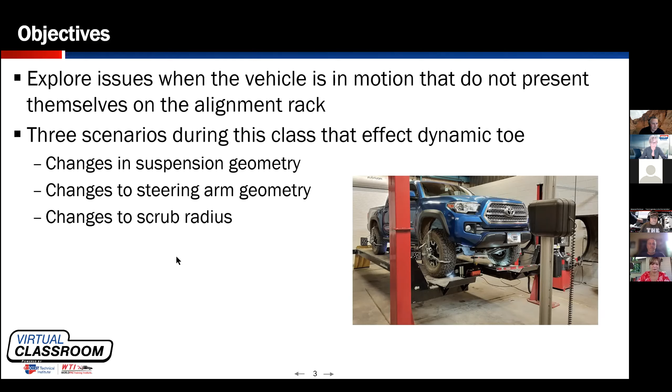So what I'd like to do, if everybody's still with me here, is start by describing what I've kind of termed as a dynamic versus static alignment. A static alignment is the toe or camber or caster.

It's measured at rest, and we get our specs from our machine, or we used to have to look them up in the book and try to find our preferred spec. But that's just a point of reference, because your alignment rack is level.

The vehicle does not have any forces acting upon the tires. Really what an engineer does at that point is try to predict or determine what that car's suspension and its tires do to scrub radius and different effects of the alignment when it's rolling down the road. So that's just a static alignment.

You guys know it's not a best practices class, but we've got to make sure we keep our alignment racks level and everything clean and turning properly, so you get a good static alignment, because the best you do on that point is really going to be reflected more, and even more important, as the vehicle's going down the road in motion, which is what I call the dynamic alignment.

During the dynamic stages of alignment, as we know, some cars are toed in on the alignment rack, and some cars are toed out on the alignment rack. Why is that? Well, the engineers take into consideration the road forces that are going to be acting on that car, and the most common position that car is going to be driven in is straight ahead at steady cruise.

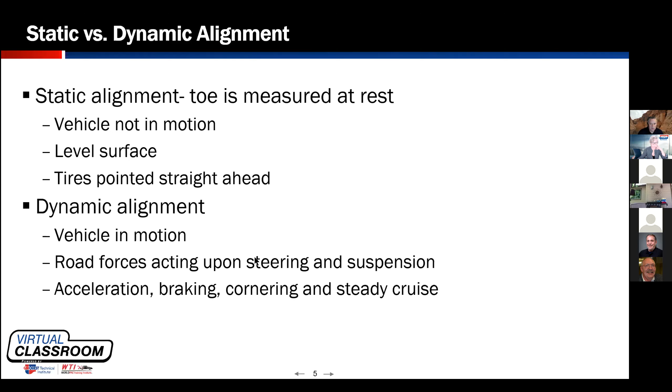As we're predicting this, something I realized not too long in my career was that toe angle is going to wear tires. I think everybody can agree with that. If you get the toe angle off, you just scrub tires completely off. One of the published industry facts I got from tire manufacturers was that if the toe setting was 1/16 of an inch off from the preferred specification, quite a bit on a modern car, then if we go 1 mile down the road, that effect of the toe angle being off will be the same as dragging that tire sideways about 7 feet on the asphalt.

Now, 7 feet, we probably slid a car like that going into the Walmart parking lot. But more importantly, if your toe angle's off, it's always going to be having those forces on it. So let's say you drove 100 miles on that tire with that 1/16 of an inch toe in. That's like dragging that tire sideways 1/4 of a mile. You can imagine how much tread you're going to have left.

So we know that the dynamic toe, how it operates going down the road, has to be very close to 0. That's the goal of dynamic alignment: whatever we set on the alignment rack, make sure it's near 0 toe when it's going down the road in a straight line. Another goal we'll discuss today is toe out in turns. This is when we're going around a corner, and I'll wait till I get to that section to dive into it.

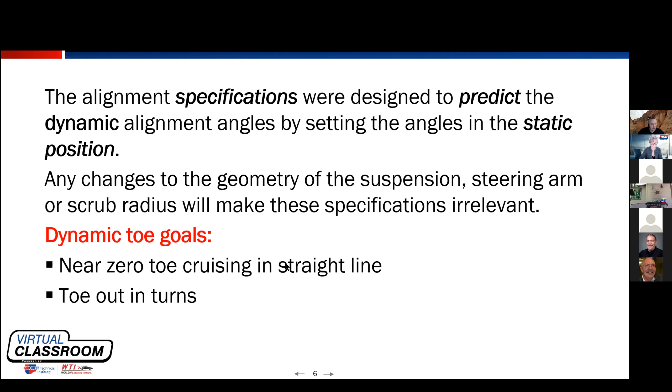But with this dynamic alignment in mind, let's look at a typical alignment. It's in the green, let's start with that. We have camber within spec at about -0.6 of a degree. Our caster is 4.1 degrees on the left side, 4.3 degrees on the right side. It's really in a good relationship to adjust itself for road crown, so I'm okay with that because the right side's a little more positive than the left. And my individual toe nails my total toe really good in the straight ahead position.

Now, the rear of this car, if it's not adjustable, it's kind of the way it is right now. If it was an adjustable car where you could adjust the camber and the toe, I would spend more time on this, making sure I got it a little bit closer than what it is. But overall, I got 1/10 of a degree of thrust angle on the bottom here. This is a green alignment. That's kind of what a lot of guys will argue when you come back and still have a problem with the vehicle - it doesn't drive good, something goes wrong, it's wearing tires, whatever it is. This is the printout you give your customer, and they're going to refer back to this and say, hey man, it was all in the green.

So this is the static alignment position. We're level, tires are pointed straight ahead, no issues. Now, the first thing I told you I was going to tell you is what happens when we have a change in suspension geometry.

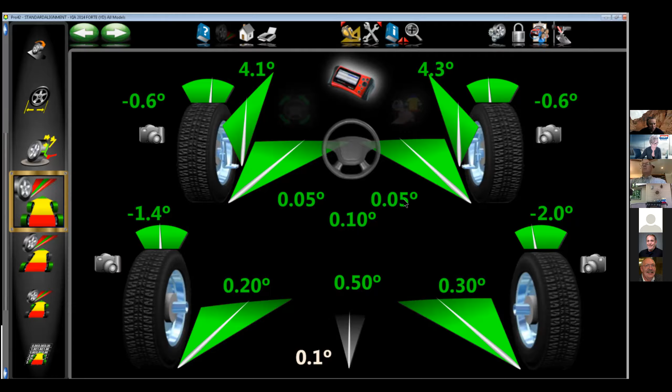So what I want to show you here is a tool. You don't have to have the tool, but bushings and anything to do with these control arms are definitely going to make a difference in the geometry of the suspension. Control arm bushings, no matter what they are, are very hard to detect on the dry park steer. When the guys are shaking the wheel back and forth, we're getting a good look at the steering linkage. A lot of times we don't see the ball joints, and we don't see the control arm bushings. All these things that hold the tire in the right relationship with the body are going to affect steering and, more importantly in this case, suspension geometry.

One tip I've noticed during the dry park steer: if you press the brake pedal while the guy shakes the wheel, a lot of times it will load that control arm and you're more likely to see a little bit of movement in it. That's not the proper way to do it, and you may miss some of them, but that is a tip. One of the problems with prying on bushings is we can pry on these bushings with pry bars or whatever in multiple directions to see if they're loose.

One of the problems is if you're not on the alignment rack where the tire's in the natural position, as if it was riding down the road, that bushing may tighten up. If you're in a wheel-free condition, you may miss a bad bushing. So there are special tools available.

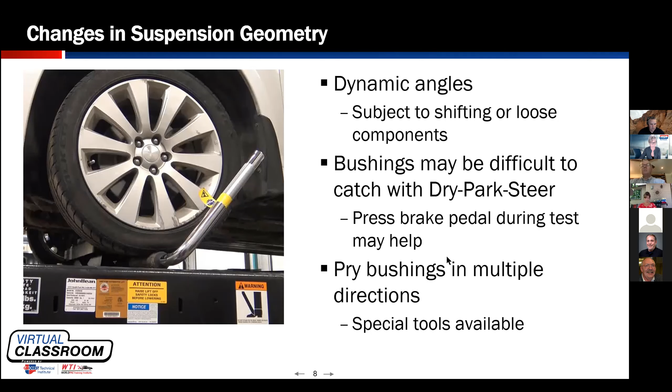I'm not trying to sell a tool here, but back to dynamic alignment. This guy's arm is on this tire, which will be loaded down on this tire even more. The brakes are set so the tire can't roll. He's going to use this tool to apply forward and backward force on this tire.

Now this is a front wheel drive car. So as the tire spins around, it acts upon the road and causes the suspension to be pulled this way. In braking, it would be the exact opposite—the road would act upon the tire, causing it to pull this way. By lowering that tire on that tool, he's going to use his arm to rock it back and forth, and we're going to see if there's any type of suspension movement here.

So here he goes. This technician is putting the vehicle at ride height. And we notice when he's doing that, this particular vertical mounted rear control arm bushing is moving.

What's that going to do to the alignment angles? What alignment angles are going to be affected if the control arm is shifting from acceleration to braking, or more importantly, is the road force or the tires acting upon the road able to move that control arm? So there's forces at work that's going to change what the engineer made the dynamic alignment or the static alignment to try to predict the dynamic alignment.

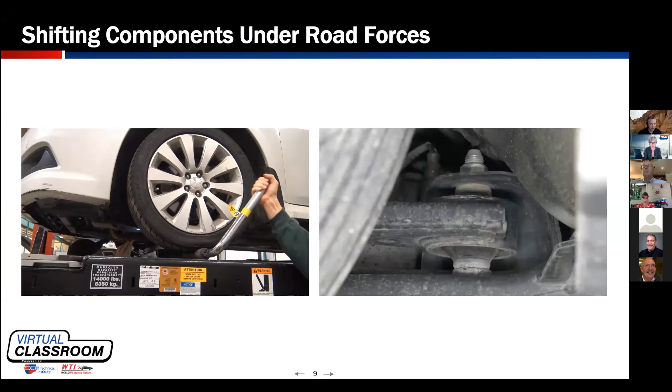Absolutely. Yeah, so what Leon was just saying, and I was going past it, so I'm glad he said something—this tool actually works in this way, and also in and out too, to check wheel bearings. I've caught issues with this tool as well. So very happy with this tool. Wish I would have thought of it, because it cost $120. So, I wasn't supposed to talk about that, but yeah, I know.

Okay, well, let's go on. There are some other things here I want to make sure we understand when it comes to steering geometry. Now, this happens a lot, because when I was a young tech, I didn't really understand.

Nobody told me about Ackerman. They told me how to turn the alignment machine on. They said get it in the green, make sure your toe is good. They told me that toe out will wear the inside of the tires. They told me all that, but nobody ever told me about turning the vehicle in to see if the toe-in relationship between the inside and outside tire stayed correct. So I didn't know about that.

As I started to learn, and especially after I had my own shop and was selling tires, I became very interested in this type of stuff. There's a lawyer who patented this concept. His name was Ackerman, so he got his name stamped on there. It's called the Ackerman principle, or more commonly what we call it in the industry, toe out on turns, or TOOT. This is based on the idea that when your car is turning, you are turning around a common center point. If we're not turning around a common center point, we're going to scrub tires.

So how this is drawn, and it's not really perfect on the slide, but I'll explain it: if we take a line perpendicular to the rear axle and extend it out for eternity on both sides, and we draw a line perpendicular from the inside front tire and a line perpendicular from the outside front tire, those will travel all the way out to wherever they go, and all three of those will intersect at the same spot during a cornering event. That makes sure the tires don't scrub.

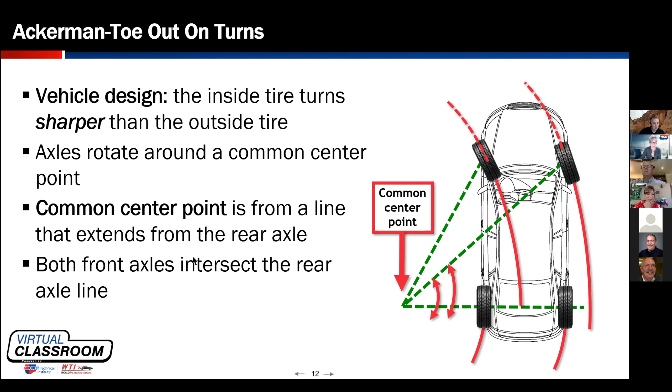So let's look at a steering arm. This is how they actually engineer, or how we actually get toe out when we're trying to turn. As we're turning, the steering arm is designed so that, say this is the left front steering knuckle and this is our steering arm: if I turn my tie rod ends 4 inches inside, this tire would be the inside wheel because it would be turned this way. Because of the design and angle of that steering arm, it's going to produce about 33 degrees of turn. Whereas if I turned it 4 inches the other way and it was the outside tire, it's only going to produce about 25 degrees.

Now we measure toe out on turns at 20 degrees, but it's not linear, meaning the further that we turn it, the further the degrees get off as far as more toe out we have. And so as you can see, that's kind of a big deal.

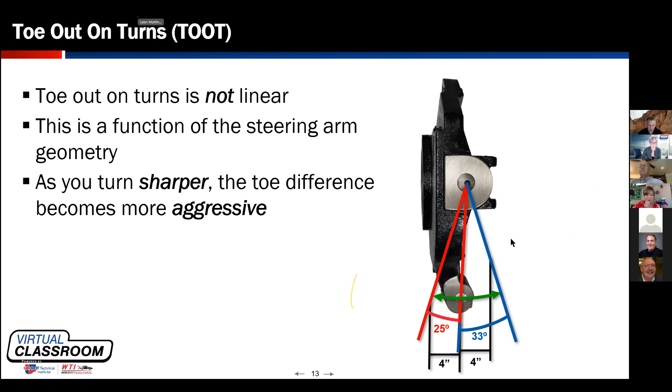Well, I'm looking at the steering arm here. Who cares, right? It's part of the steering knuckle, but what can actually happen to that steering arm? What could happen is somebody could do a curb strike, slide the car sideways in Butte, Montana on an icy road into a curb. It's going to more than likely bend the tie rod end or your steering knuckle, and your steering arm's going to be tweaked out of position. The other thing with our newer modern cars is we have to look at the metallurgy this stuff is made out of is not what it used to be.

And so I've got a nice lead shot ball peen hammer right there, and if you've been in the alignment industry as long as Leon and I, that hammer strikes that point on the steering arm to knock that tie rod end loose in shops all the way across America every day. Unfortunately, with the lighter design in the steering knuckles and stuff, you can actually bend them.

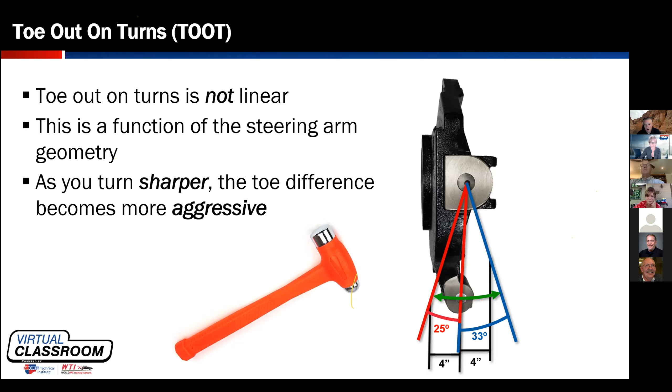So let's just talk, we know how we can bend it. I've got a great animation here just to show you the relationship of toe as it's going down the road in a straight ahead line. This was designed so that our front tires will be at 0 degrees.

And as we turn, we're at 20 degrees now. You notice the outside is about 18 degrees, so there's about a 2-degree difference. That's really generic in difference, and it makes a big difference on how long the vehicle is and stuff.

But here we have our curb strike. So let me go back just a little bit here, to this point in time on the alignment. We're coming around the corner, everything was good. I want to make sure I highlight this curb strike that's coming up. The red portion of that steering arm got bent because that tire hit the curb.

Now it goes into the alignment shop. The alignment tech sees that, hey, our toe's out, it's out quite a bit. So naturally, without being aware of toe out on turns or anything else, he sets the alignment. Now going straight down the road, we're still at 0 degrees, so we really have no problems.

Notice the relationship now, and notice the black marks coming off that tire as the toe out on turns is no longer there in the right relationship. So it is a big deal.

Some of the tips here: if a vehicle comes in and needs a large adjustment, I want to know why the toe needs to be adjusted that far. I also want to know, before I put an aftermarket shim in, before I do anything else, what in the world happened to this vehicle, and has something else changed?

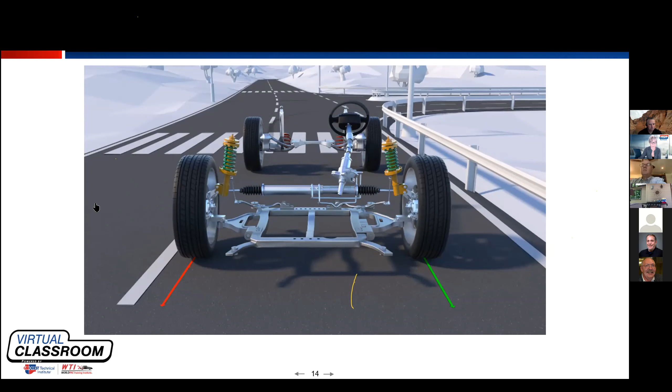Anybody else have something they want to chime in? Let's look at it here as we go through. I'll just take a short screen here. This is the vehicle turned at 20 degrees.

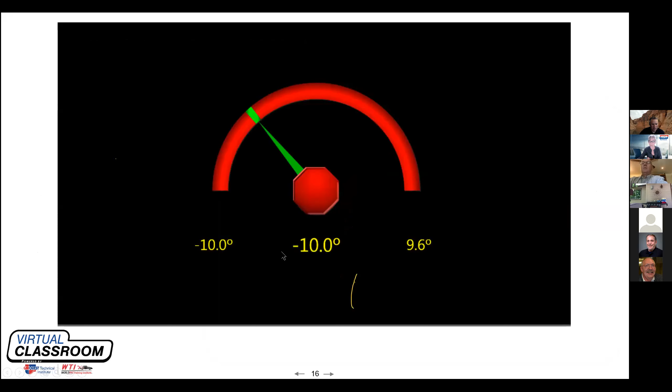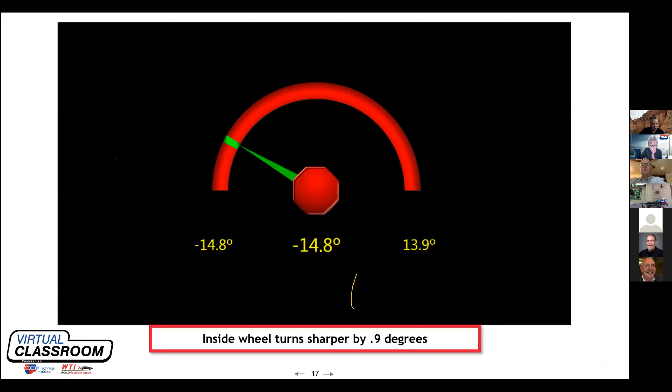Turned 20 degrees to the left, we see that it's about 2 degrees more than the right side. That's our toe out on turns. Notice it's not as much at 10 degrees as it was at 20 degrees. Okay, that means it's not linear. That means it's going to grow as it gets wider and wider, more and more, the closer I get to 20 degrees.

Now I got a couple examples here. I have a pretty good one on top. We're at 20 degrees, we have over 1.5 degrees toe out on turns. Depending on how long that car is, that may be perfect.

Now look at the bottom. I have a 20 degree and it's a 15.8. So I have about 4 degrees difference. That may or may not be too much.

How do I know? Well, I'm going to do the toe out on turns measurement on both sides. So when I turn it to the right, if it's still not 4 degrees, something's bent. If it goes to 1 degree, then something's bent. There's specs for this, but on both sides, if it shows a 2 degree difference in toe out and turns when you turn the wheel one direction versus the other direction, they better be really close to being equal.

Just because, you know, I know we have Hunter alignment machines, and I'm not promoting any type of alignment machine, but these screens are from a John Bean.

What if you're a guy that just has a turntable? Well, make sure you have a degreed turntable. We used to do these manually without the aid of the machine. We would turn it to the inside tire was at 20. We would walk around the vehicle, look at the outside tire, and make sure that they were the same, or had the same toe out on turns on both sides.

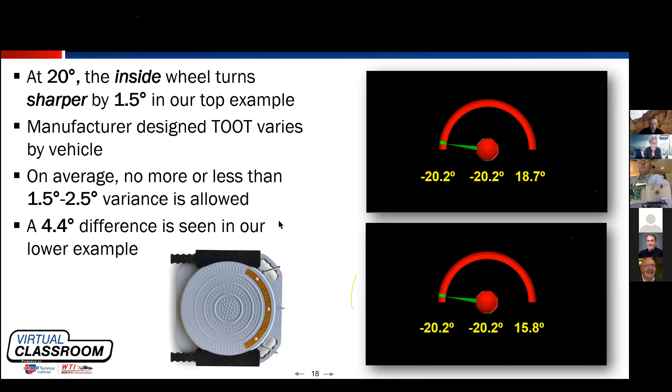All right guys, well this is a big topic here. This is going to take a little bit more time than the other two. So we've seen changes in suspension, we've seen changes in steering geometry, and now I really want to talk about changes in scrub radius.

For the most part this may or may not be a common term with a lot of your alignment technicians, especially because we've had to train them on the fly so they've learned to turn the machine on and do alignments. We may have one guy for a big shop that has a really good alignment guy that understands some of the diagnostic angles. Scrub radius is one of those things you got to keep in the back of your mind when you're doing any type of alterations on a vehicle, or a vehicle comes into your shop that has been altered. And when I say alterations, guys, we got lowering kits, lift kits, wider rims, taller tires, lower profile tires, we have all of the above, a large gamut that the American public loves to do.

They love to make it their own. Fast and Furious caused a bunch more cars to be modified. They don't always drive good, okay? And I get that, some of that lies on them.

We can tell them right off the bat, disclaimer on the alignment, this is an altered vehicle, I can't help you with that. However, understanding it may give us a bit more insight on what not to do if we're a tire shop, what to look out for to really have a conversation with the customer. And also, if you're interested in doing that kind of stuff yourself, which I love to do off-road modifications, scrub radius has taught me to take a measurement before and after the alteration and make sure your scrub radius is almost the same.

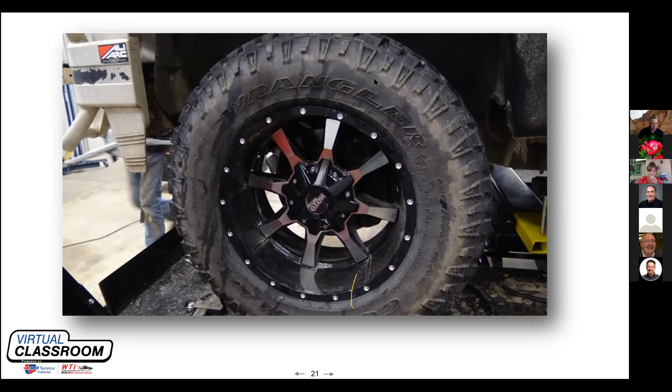So they've done some modifications. They want the tires to stick out a little bit. Looks tougher on Saturday night when they're cruising the mall. I'm sure a lot of you guys have seen this in your shops. Very common way to do it.

So what I want to ask is this. When you see these, this truck right here has got a problem. It typically wears these Wranglers out in no time. Where this tire would make it 30,000 miles on this truck, this guy is getting 15 to 20,000 miles, and there's toe wear and cupping that happened, and he's put shocks on it, and he's done other things. This was a student of mine, and so he brings it in.

So what effect does the height of the tire and the rim offset have on the dynamic alignment? Well, we know that especially on wheel bearings, if you get a very large rim with a plus size rim and a lower profile tire, it puts a lot more pressure on that wheel bearing. Well, that's not what I'm talking about. I'm really talking about how does it affect the toe - how does it affect the dynamic toe? Because man, that's what's going to wear tires, right?

So before I get into scrub radius, what I really want to do is show you how we get scrub radius first. And there's a disclaimer on all this stuff too, because I've gone down scenarios with guys where everything is bent and everything is worn out and it's all wrong. And come to find out we didn't do the rollback compensation good enough, or something has changed, or the camber angle wasn't set as close as it could be. There's a problem with our best practices that are leading us to a false conclusion.

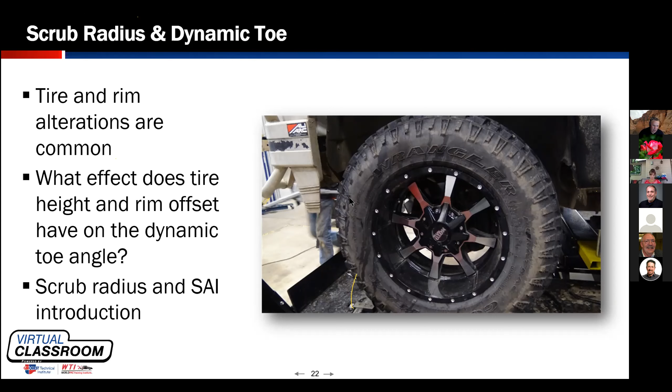So with that being said, we'll come back and remind you of that later, but how do we measure scrub radius? Well, what's the purpose of scrub radius? Scrub radius just determines where the tire is going to turn around, and it's measured using the SAI angle, or ball joint inclination, kingpin inclination - some other terms we use in the industry. It's the same line that if we were looking on the side of the car to determine caster, it's drawn through the upper pivot point center, through the lower pivot point center, except for SAI we're looking at it from the front of the vehicle.

So we see our SAI line and we see our true vertical line, okay? And so the degree of SAI is the difference between true vertical and the center line between our steering axes. Short long arms tend to be a little less, and MacPherson struts had a pretty good angle for that strut to come down in there from the upper pivot point. So they would have maybe more SAI.

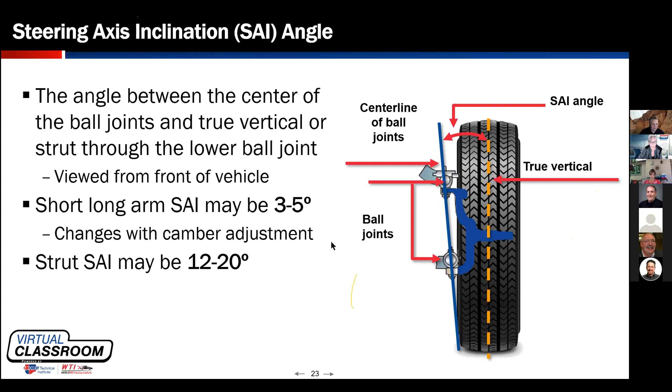So SAI is a diagnostic angle I look at on vehicles almost every time because I want to make sure it's pretty close to being even side to side. It can cause some weird pulls and some other things that may not be reflected in the caster angle, so I just want to make sure it's pretty close - control arms aren't bent and things of that nature. So we use this angle, the SAI, and we also use the center of the tire line directly in the center to measure what we call scrub radius.

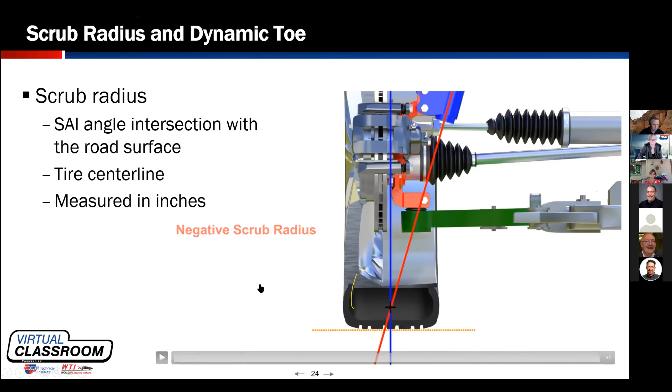And I'm going to go ahead and play this little animation here. What this animation shows us is positive scrub radius is when the SAI angle lands on the inside of the tire, true vertical center line, and negative is when it's on the outside of the tire. So I'm going to break that down just a little bit as we look. This is positive scrub radius - what I mean is the SAI angle is intersecting the road surface on the inside of the tire center line. Well, what does that mean to us?

Well, here's the thing - that toe angle we were talking about, sometimes being positive, sometimes being negative, well, it has an effect on what happens dynamically.

If we have a positive scrub radius, this section of the tire here, there's more tire outside of the SAI line than there is inside the SAI line. Meaning, if I was going to call this a handle, I have a shorter handle on this side, I have a longer handle on this side, and the road force or tire force acting upon that handle is what's going to change my toe as I go down the road.

Now, this is a front wheel drive vehicle, which means the longer handle is going to be pulled because the tire is acting upon the road surface. So on this particular vehicle, my static alignment spec, while it's on the alignment rack, may be toed out. And the reason is when I'm going down the road driving at steady cruise, this longer handle on this side is getting pulled more than the shorter handle on this side, causing the tire, if we're looking directly at it, to toe in during the dynamic alignment.

Okay, well, that's pretty cool. If it was rear wheel drive, it would do just the opposite. And that makes a little more sense because all of our toe specs used to be toed in from the factory when we had rear wheel drive cars, because the tire, the handle, was getting pushed on by the road surface since it wasn't a drive tire. In that case, the tire would tend to toe out with positive scrub radius.

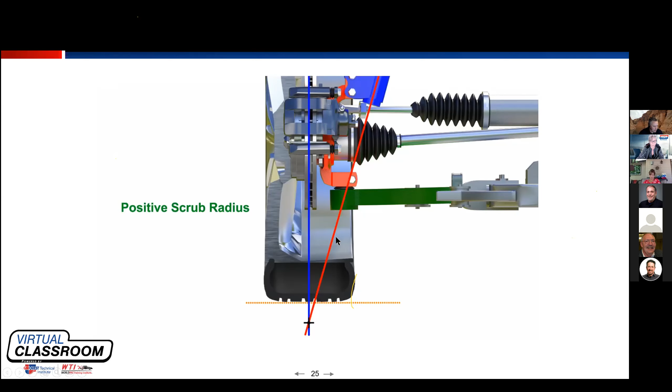And so the predictive of the toe angle is really coming from the scrub radius. And not all of them are positive. We have negative scrub radius where the SAI intersects the road surface outside the tire. And very few older cars have 0 scrub radius. However, with the advancements in electrical power steering, we're starting to see a lot more cars with scrub radius closer to 0 than we did before.

The reason why is you got to think about this handle. I'm talking about steady cruise for the alignment, but what about during braking? Well, it changes the tire orientation quite a bit. What about during acceleration, especially when I'm only accelerating with one tire? What are you talking about, accelerating with one tire? Talk about torque steer. Front wheel drive cars have a lot more horsepower than they used to. If one tire is receiving most of the torque through that axle, its handle is going to be pulling. That's what causes torque steer.

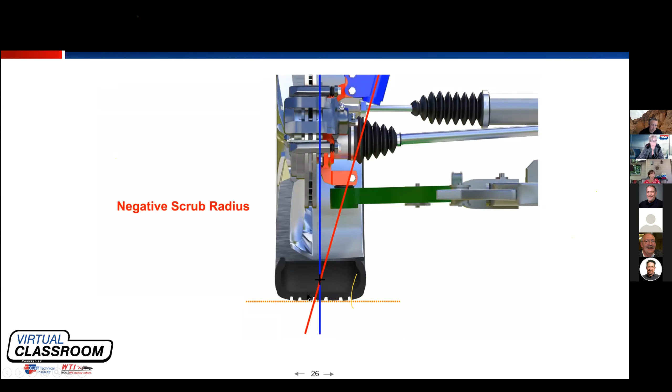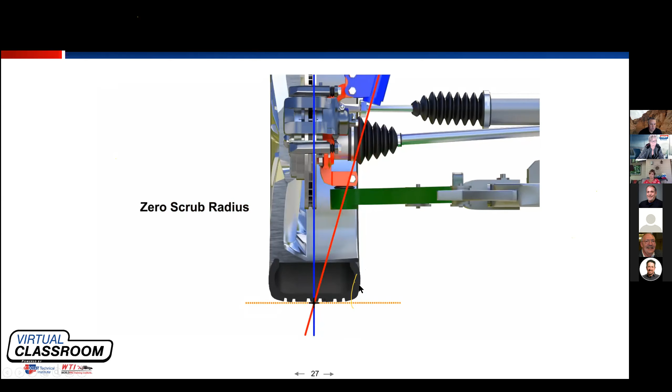So, you know, industry, we're trying to push it towards less scrub, 0 scrub radius than we used to. That Honda Type R with the 300 and some horsepower, it's got almost 0 scrub radius. They say that's why it doesn't have much torque steer. Okay, so that's how scrub radius is determined.

Now let's go back to what I'm talking about today, changes to the intended scrub radius. Well, how would you ever change it? You can't adjust it in the conventional way where you turn an eccentric or turn something else. But you can mess it up, let's just put it that way.

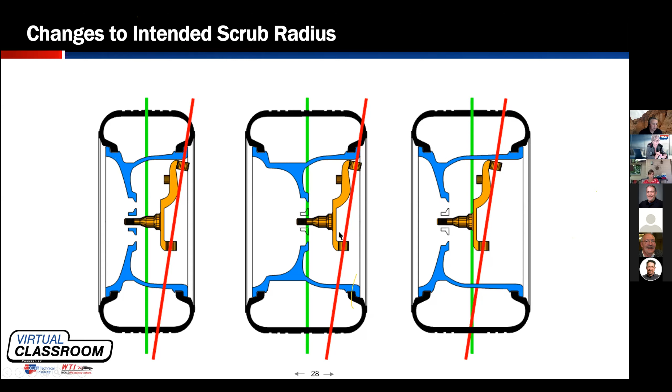So you guys that sell rims know offset is king on this stuff. But offset's also influenced by what offset I have to begin with. If I just have a stock rim and I put a bigger tire on it, this is becoming more and more popular because I have a Tacoma. The stock rims are nice, there's nothing wrong with them, they've got the factory TPMS sensors in them. I'm okay with that, but I would like to plus size my tire a little bit.

If I plus size my tire, this is my SAI line, this is my tire center line. Let me back that up. It had a little positive scrub radius before. As the tire size grows, it takes my scrub radius away. So if I just put a much larger tire on a stock rim, I ruin my scrub radius almost as bad as if I put the wrong offset rim on it. So it's very important to keep this in consideration. If I put a larger tire on, I've got to change the offset of my rim a little bit to move the center line over so that my scrub radius is near what it was when it came from the factory.

I get a little pushback on this because some guys say, well Lonnie, if I'm only going from a 265/70 to a 265/75, that's not going to change that much. And he's absolutely right, it's not. But if I go from a 265/70/16 to a 315/75/16, it's going to change it quite a bit, and I'm going to lose my scrub radius. Now my factory alignment spec is actually going to cause tire wear instead of prevent it.

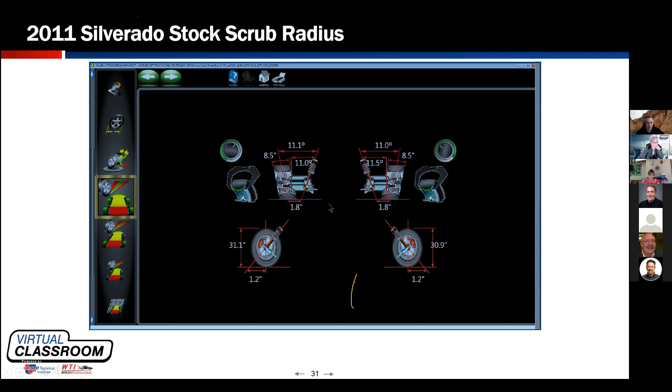Now we're going to go back to this vehicle, which has a new tire size of 32.3, which is only a half an inch taller than the stock one, not a big increase. It's got a 3-inch wider rim on it. It has a little bit of offset difference between the two, about a little over half an inch if you're an inch guy of offset difference, but you can tell that's not the stock rim. So in this case, what's going to happen? Well, what's going to happen is, as you can see, the center of the tire came out on the vehicle.

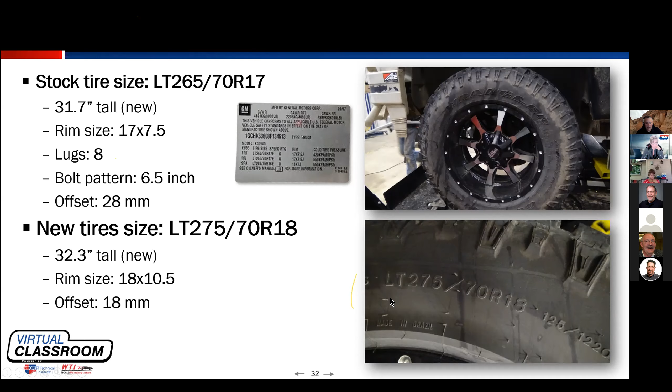Now I'm going to flash back to this other one. You can see the dish right there on the tire, and you can see how far this tire sticks out past the bumper. So if this was stock, this was our positive scrub radius. This is after the modification, because our tire size really didn't get too much bigger there. So we'd expect our scrub radius to be much larger on our alignment machine than the one I just showed you that was 1.8.

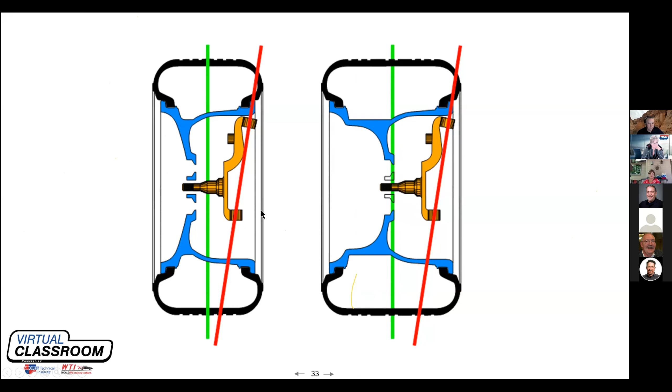Now it's got 4.3 inches, 4.2 inches, over twice the amount of scrub radius than what it came with from the factory. So if the toe-in spec was a tenth of a degree on each side from the factory, is that going to be adequate here? Do you double it? What do you do at that point? It puts you in this jackpot kind of situation where you have a condition that is creating a real issue right there.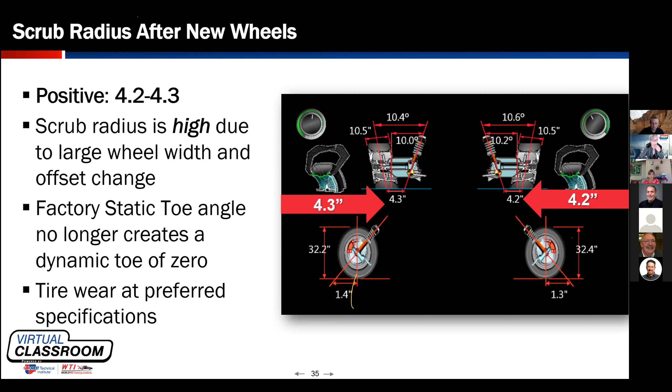Before I go to this slide, I'd just like to ask one more time if you guys can chime in if we have any questions before I talk through. I've got a little bit I want to tidy up at the end, but I would like to hear some feedback from anybody.

Well, I would like to say that Jerry has put in the chat that these are outstanding examples, Lonnie. Thank you. Yeah, I know he did. I see that.

One of the things you have to remember is there are so many different facets of this. When we go to the whole class we teach with this, changing the SAI angle from factory with different lift kit scenarios also fits a whole different realm into this.

As far as tips go, alignment best practices are critical. So if you see something, this is what I do and I get my students to do it, because I feel they want something to be bad. They get so excited about the diagnostic angles when I tell them, and different technicians get so excited about this part, and the other part with diagnostic angles like SAI and included angle.

If you get a chance to see this whole class, we can see what's bent on the car. If we have a camber angle that just won't come back into spec or is way off, and we're using aftermarket shims and stuff, we can see what's bent with those types of angles. So there's so much fun with this.

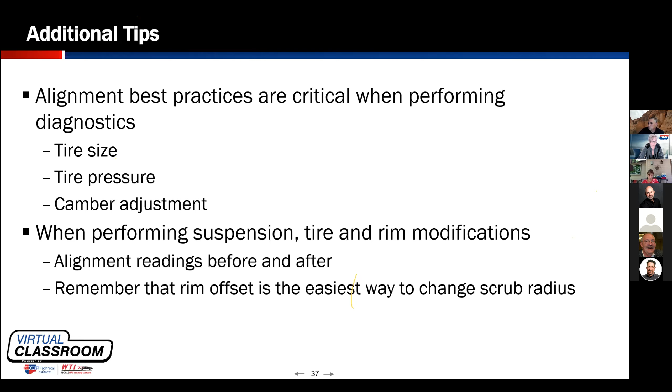Okay, well, hey Lonnie, also another question. And again, this just comes from, I don't know, an enthusiast, not a guy that's doing alignments every day.

But I understand, like when we're talking toe out and toe in and all these things, measuring them in degrees, because degrees stay consistent regardless of the size of the tire. But when people make the pivot, and they talk about, you mentioned a few times, like a 1/16 of an inch of toe out, right? So that is all relative to the height of the tire or the size of the tire.

Yeah, and it's also relative to your specs, because you got to remember the older cars, especially in the 60s and 70s, all we had was camber in degrees, but our toes were usually in inches, and that's the way the spec was. Degrees became a more modern term, but if you're an alignment shop or a body shop that actually does frame straightening, you actually talk in minutes. So it really just goes back to, hey, we just go check and see what the spec says. If the spec's in degrees, that's where I'm at. If the spec's in inches, go ahead and use that.

Using your common example of a truck where I'm putting on oversized tires, right? So that thing came with whatever, 245/75 R16s or whatever, a 3/4 ton heavy, and then I put some massive tires on it. Then if I was aligning that thing to whatever, a little bit of toe out or something, then just the fact that I went to a larger tire means it's going to be a lot more toe out, even if I keep things consistent, right? Like, in inches I see what you're saying, because you're talking about there's a longer distance from the center to the outside of the tire.